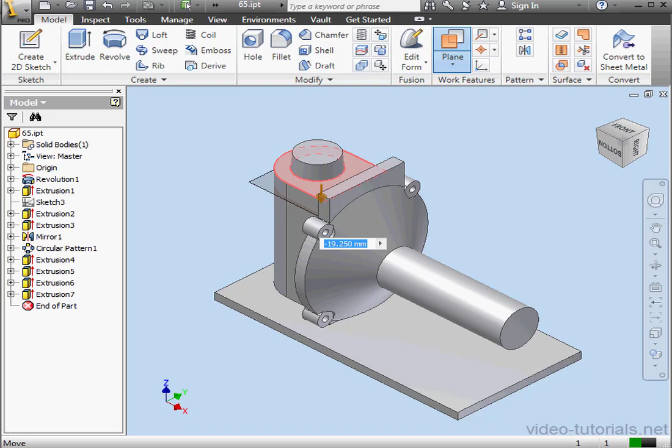Let's begin by activating the plane tool. I'll grab this face, drag it down, and release. Let's offset the plane from the face by -10 millimeters.

Okay, let's create a sketch on our new plane. Right-click on Workplane 1 in the model browser and select New Sketch. Activate the Project Geometry tool, and let's project these three edges to our new sketch.

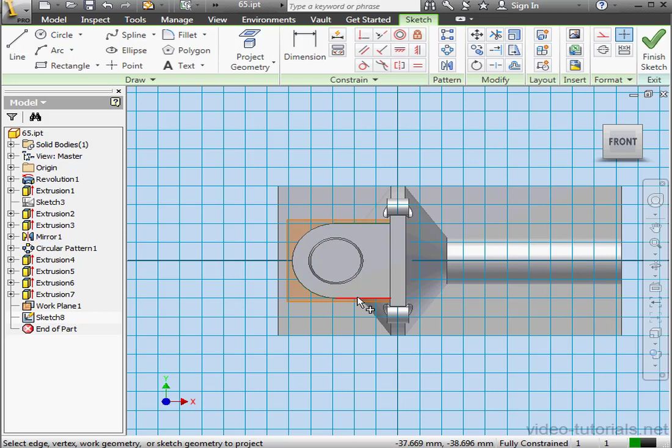Let's finish and exit the sketch. Now right-click on Workplane 1 and unselect Visibility. This line here is going to be our rib path.

Let's right-click on this face, select New Sketch. Activate the Project Geometry tool. Let me just zoom in a little bit so I can see better. And let's project this point.

This line. Let's activate the Line command and place a horizontal line, then a vertical line. And let's close our profile.

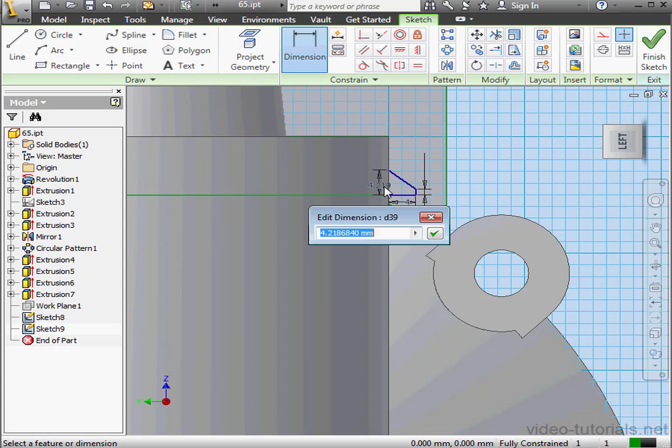Dimension, 4 millimeters here. This distance, 1 millimeter. And between these 2 points, the distance will be 2 millimeters.

Let's click on Finish Sketch.

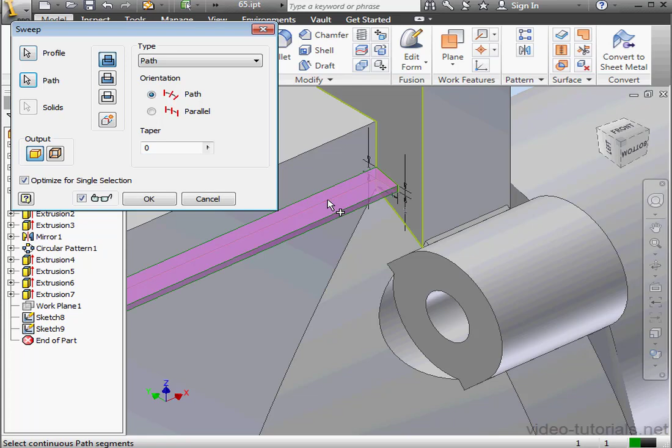Now I'm going to activate the Sweep command. First step is to select the profile. Next, we select the sweep path. And let's click OK.

Activate the Fillet command now. For radius, we'll enter a value of 1 millimeter. And now let's select our edges to fillet.

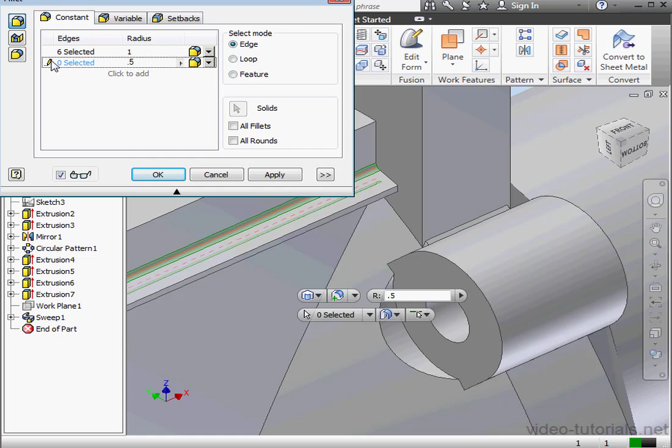A second edge here. Let's create a 0.5 millimeter fillet now. We'll apply it to this edge here, and this edge. And let's click OK.

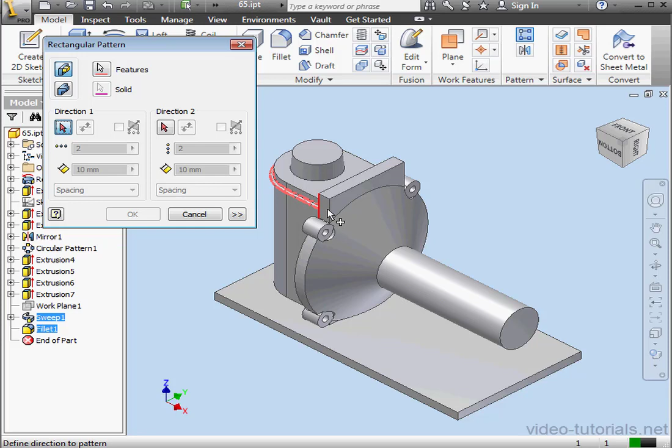Next, I'm going to activate the Rectangular Pattern tool. First, let's select Features to Pattern, the sweep and the fillet. The pattern direction will be this edge here. Let's reverse the direction.

The number of instances, let's try 12. Let's actually make a little more. Let's add 14. The distance, 10 millimeters. Let's click OK.

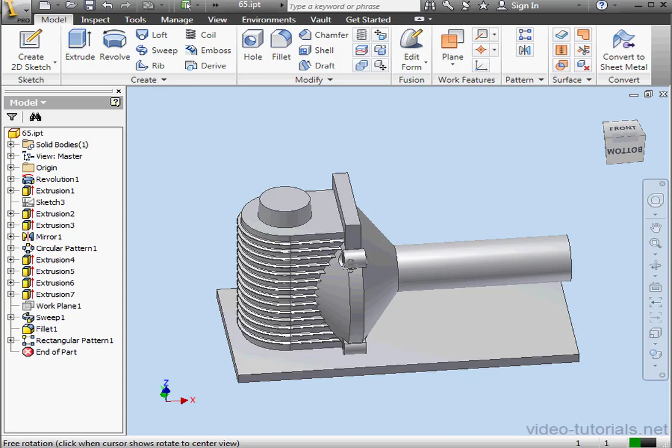Now I'm going to create the housing for the front barrel. Let's insert another plane. We'll drop it here. Now right-click on Workplane 2 and select New Sketch.

Let's actually go to Wireframe View. Activate the Circle tool. Snap the center point here, and let's dimension the radius, 50 millimeters. OK, let's click Finish Sketch.

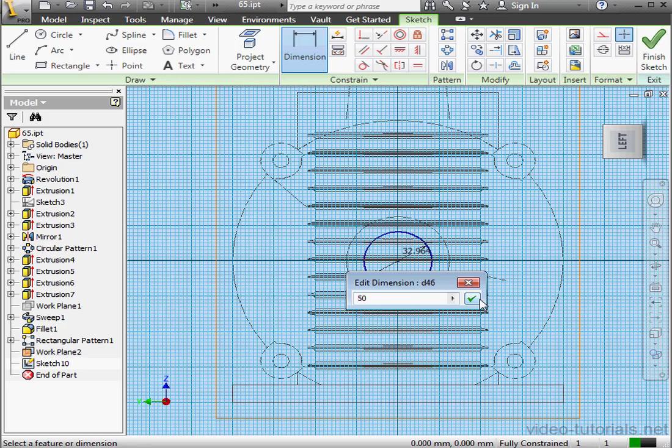Now let's activate the Extrude command. Let's extrude in both directions for 20 millimeters. I won't use the Symmetric Extrusion subtool because I want to apply a different taper value to each direction.

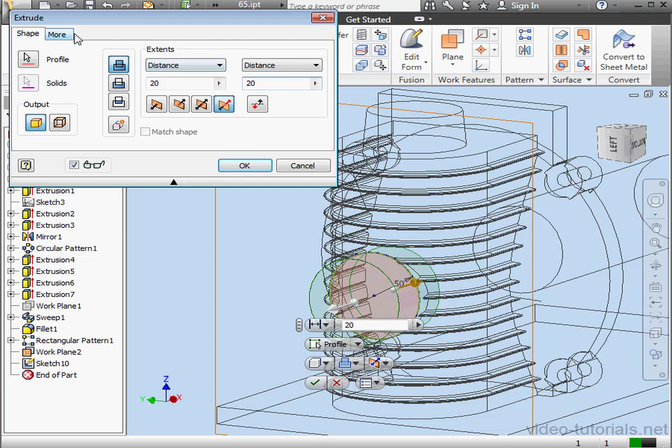Let's go to the More tab, and here's where we apply the taper value. In the first direction, it'll be -5, and in the second direction, 5.

Let's click OK. And let's take a Shaded with Edges view so we can better see what our model looks like. I'll also hide Work Plane 2, right-click and unselect Visibility. And this concludes our fourth lesson on this model.